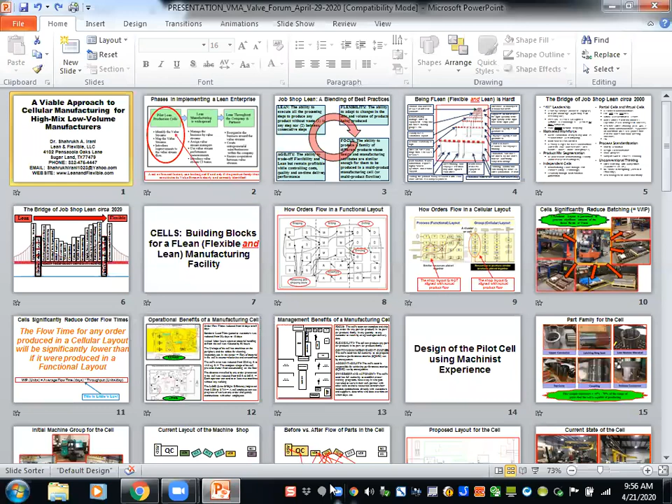Good morning. Today's lecture is titled A Viable Approach to Cellular Manufacturing for High-Mix, Low-Volume Manufacturers. It is a case study, and the goal is to show that when you apply methods like value stream mapping in a high-mix, low-volume environment, the ability to identify product families and be able to co-locate all pieces of equipment and support services needed to produce each product family, that is the foundation for implementing Lean.

And this case study was actually work that we did at Superior Completion Services. So there is evidence that the data analysis and the concept come together.

So when you look at people who talked about lean enterprise, this is again a slide taken from Brian Maskell Associates. The overall view has always been over the years that when you implement lean or you try to achieve the lean enterprise, you should go in three steps. So the first step is you pilot the implementation of production cells. The second step is, you try to make lean manufacturing widespread. And then finally, you try to run lean across the entire enterprise.

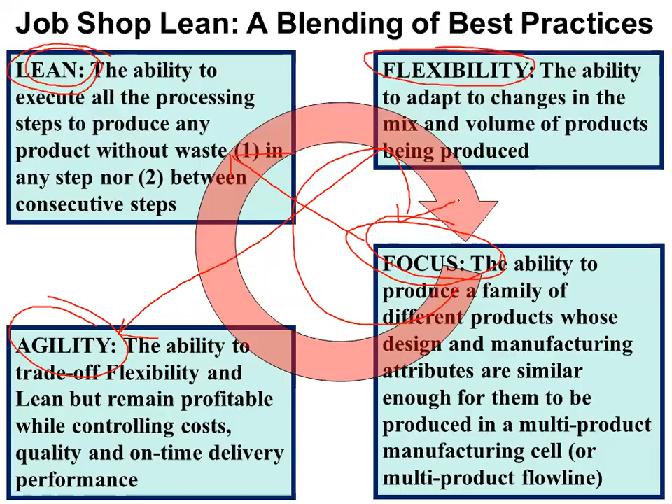And I hate to throw water on your desires, but when people say we wish to be agile and we want to be flexible, they have to understand that all of these operating conditions are alien to a typical Toyota assembly facility. And yet, if we learn about how to attack these challenges, that essentially is going from being lean to being flexible. And agility essentially is the ability to be quick enough when you're having to change mix and volume.

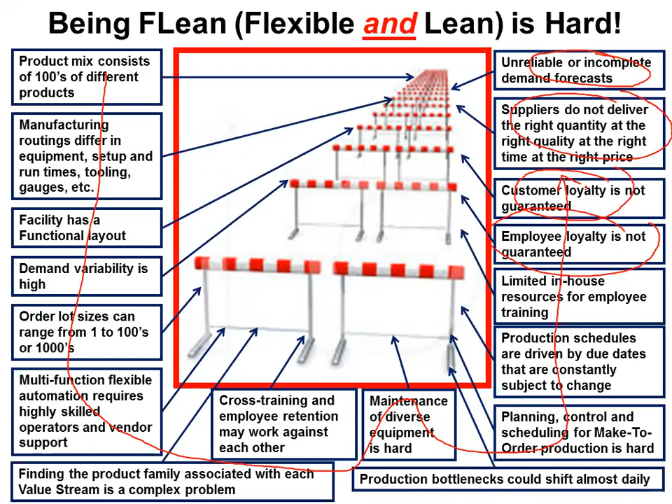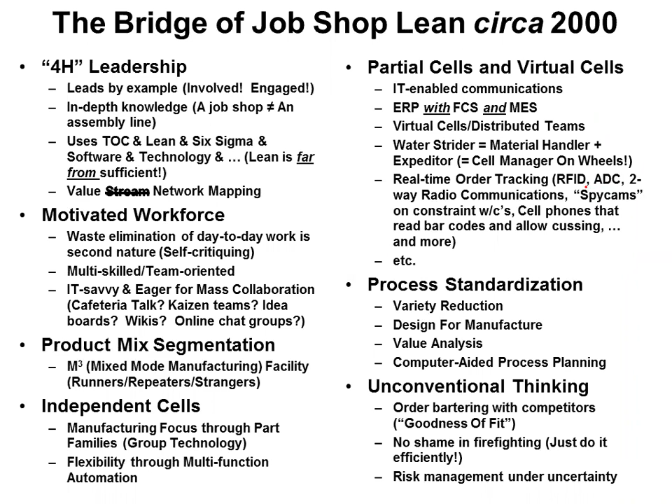So when I learned about lean, that was in 1999, and I've read the book Lean Thinking, and then the Forging Defense Manufacturing Consortium had given me funding to basically start developing this whole body of knowledge that today is called Job Shop Lean. This was all I had. This is what I recognize: if any high mix, low volume manufacturer could achieve all these capabilities, they would be pretty flexible and lean. So come forward 20 years later, that's today.

I mean, again, just as Toyota has a house of Toyota, which people have called the house of lean, I said that, look, we are basically going from being lean on one bank of the river to being flexible on the other bank of the river. So there is this bridge. And when you follow the five principles of lean that were first put forth by Womack and Jones, the three core capabilities that are needed to go from lean to flexible is this one.

First one is group technology using data science. This whole idea of how do I form families of parts when I have, say, 1,000, 5,000, 10,000 so-called different part numbers in my database. I do understand that many of them may just be different because the part number was changed, but how to distill from 10,000 unique part numbers to, say, 2,000, and then in that 2,000 part numbers, how do I know how many part families I have?

Because after all, every work cell I designed, every focus factory I designed is going to be built around a product family. So this is one of the requirements of the bridge, this whole ability to form product families. This then is the column that holds up the bridge on one end, what I would call a flexible cellular layout. This whole idea of be focused, but be flexible.

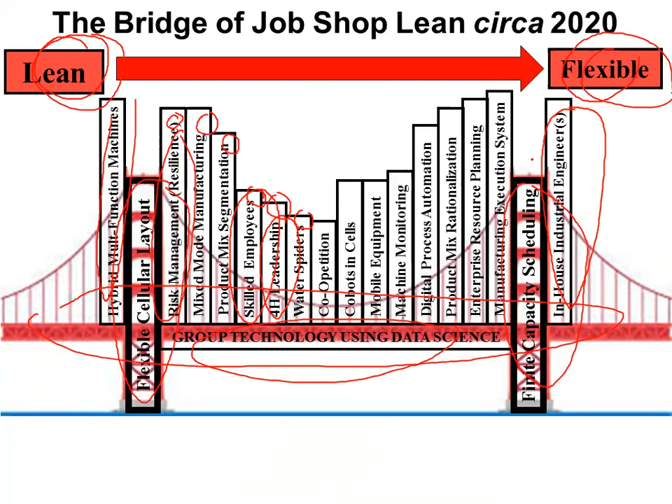And of course, my bias has always been, do you have at least one well-trained, competent industrial engineer to help you with implementing the so-called bridge of job shop lean?

So in my personal experience and bias, of course, is that cells are like the building blocks. If you want to be flexible and lean, you have to basically start with product families and work cells.

And continuous improvement happens when you find that it is infeasible to implement cells. So then you say, well, how do I go to plan B or plan C, where in principle, yes, I'm still working around the product family concept, but because I have not been able to put equipment into work cells, how do I now maintain reasonably something called virtual cells?

So where did this concept of cells come about? I mean, this is an age-old concept where people said that, do you or do you not have a functional layout? In a functional layout, identical equipment is kept co-located in things called departments.

So here you have the shaping department. These are all the milling machines together. There may be different types of milling machines, two of one type, three of the other, but they're all kept together. And these are drilling machines, these are grinding machines, and then you have final assembly.

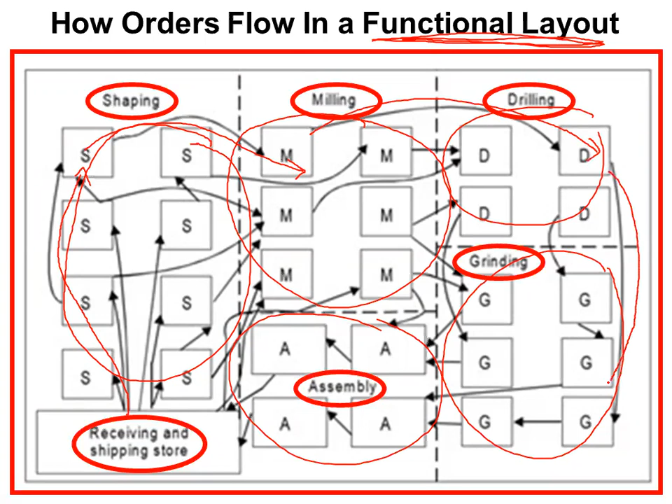But when you look at the physical flow of a product, it begins as raw material, goes to one machine. Then from there, it transitions across the department to one machine. Then from there, it transitions to another department. From there, it transitions to another department. And then finally, it ends up in assembly. And then the product goes out the door.

Horrible. And to be honest with you, this was mentioned in the 60s when group technology first hit the waves. And today, still, I found out very many clients or would-be clients, when you walk into the facility and you ask them, sir, can you please take me through the facility from raw to finished, they have basically left their equipment organized into these functional departments.

And when you look at the success of the Toyota production system, one of the cornerstones is they have aligned their equipment naturally with the way the products would flow through different pieces of equipment.

Okay, so this is not to take away from the fact that at Toyota, their managers have worked up through the ranks. And so they know how to manage people who are now doing their work. This is not to take away from the fact that good people being hired and trained and nurtured and incentivized is also a big secret of the Toyota production system.

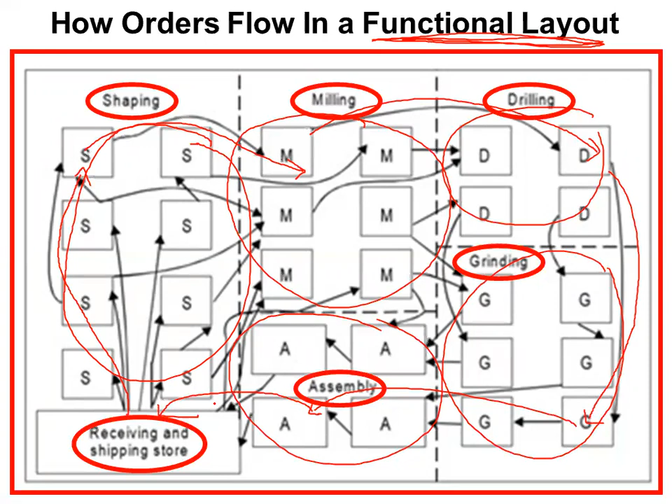But at the end of the day, it's how you do work, how you make product that is also important. So many US manufacturers haven't even got out of square one, and then they claim to be, or they wish to be flexible, but they also wish to be lean.

So when you look at going from functional layout to cellular layout, you can see that in the functional layout, the shop layout is not aligned with actual product flow. In the cell layout, the shop layout is aligned with actual product flow, and the entire product mix has been broken down into these product families.

This is one product family, this is another product family, this is another product family, this is another product family. Now, you might be saying, well, when you look at the work cells, you have the same equipment now being distributed in multiple physical locations. So isn't there a loss of flexibility when you implement cells?

Absolutely. And that is why when you implement cells, you also have to do something called product mix segmentation. You have to look at all the parts you're making or wish to make and segment them on the volume and similarity of production into runners, repeaters, and strangers. If you Google this term, that was basically a very old concept, but it was the basis for saying that we need mixed mode manufacturing facilities when those facilities wish to make a high variety of product in different volume.

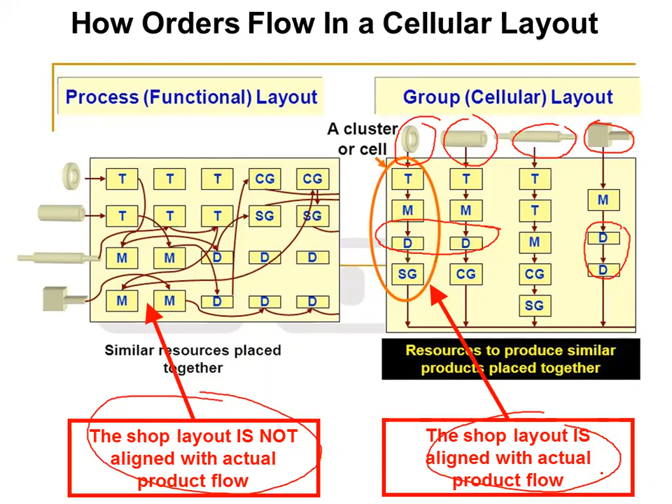Transformation from a functional layout to a cellular layout is a cornerstone of job shop lean. Again, all I'm saying is that this is what has been known to have worked in the 1960s in Britain and other European countries. I think where they failed was the people aspect and the management aspect. Toyota has figured that out. Unfortunately, since they are high volume assembly, a lot of their practices cannot immediately be transferred to high mix, low volume.

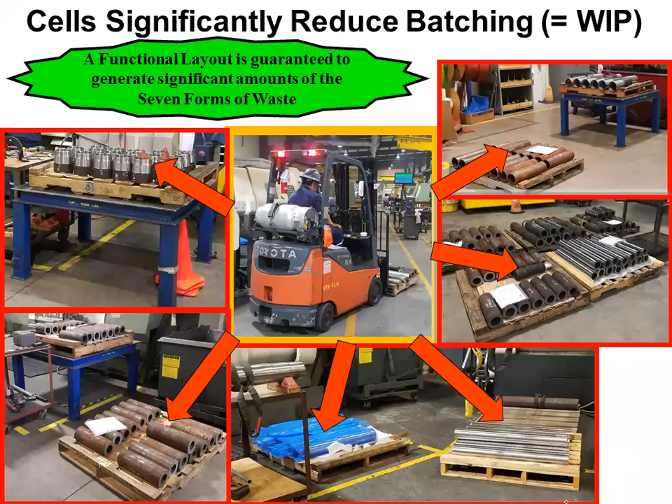So what do cells do? They basically attack work in process. When you look at a functional layout, it is guaranteed to generate significant amounts of the 7 forms of waste. And you know how easy it is to pick that up? Go look for when you are walking through the facility, either as a Gemba walk or walking the floor of a product, you look for forklift activity. Look for forklift activity, and then you look for pallets, pallets, pallets, pallets.

This was the situation when we first began to implement job shop lean at Superior Completion Services. And the goals were pretty straightforward. We want to minimize the use of forklifts within the shop to the extent possible, especially around CNC machines. And two, we wish to have a complete handle on how many jobs are in queue, where they're at, and we wish to minimize the number of active jobs.

If you know Little's Law, it's a very simple way. There are lots of assumptions for Little's Law, but it basically connects that when there's a lot of work in process in the manufacturing system, it will take a long time to get orders out of the system. Very simple. So the more you cut down work in process and the more you make it possible through cells to get orders out quickly, you're going to have both quick delivery and less cost of production.

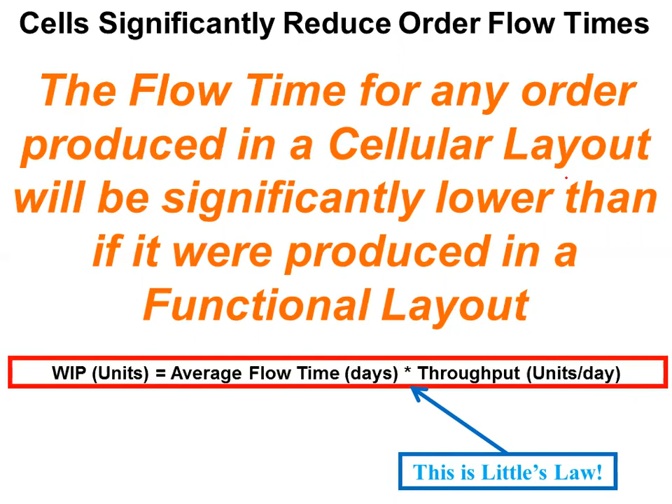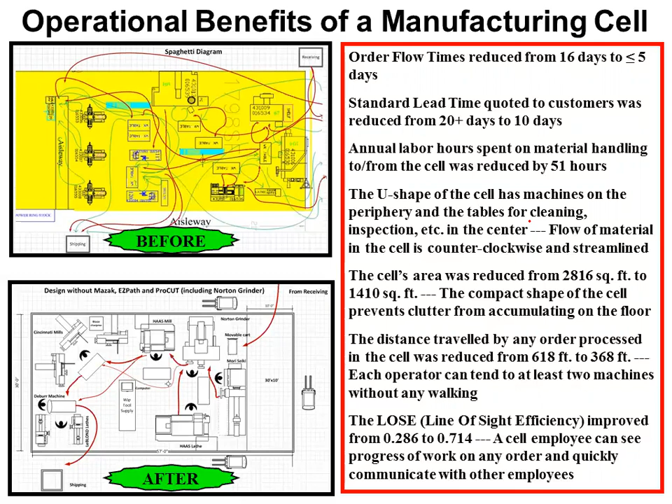And there are, of course, support services and other things you can do to increase the benefits you gain. But going to work cells is also an alternative to continuous improvement, not necessarily calling it lean. So these are the operational benefits of a cell.

These are the management benefits, and I would like to spend some time on that. How does a manufacturing cell get you some very important benefits that people attribute to lean? The first thing is focus. The cell doesn't do anything under the sun. The cell has a certain boundary, a certain focus in what they produce. And that helps because there's a learning curve effect.

They become expert at producing any order, but they have a sense of, well, I produced this order in the past, this new order I received is kind of similar, I can do it. And the more you make the equipment flexible, the more it will be possible for that same cell to flex and make a variety of products. So that's the second thing, that the cell is flexible.

I mean, the way you design cells in high mix environments is to create product families. And a product family is not identical parts. As long as that group of machines can make parts with this range of design and manufacturing attributes, it can be produced in the cell.

There's the second benefit you get from having work cells: flexibility. Then you have this culture where that team is authorized to make any improvements they seek, and they can do it with whoever in the cell, whenever they wish to, as long as they make the improvements.

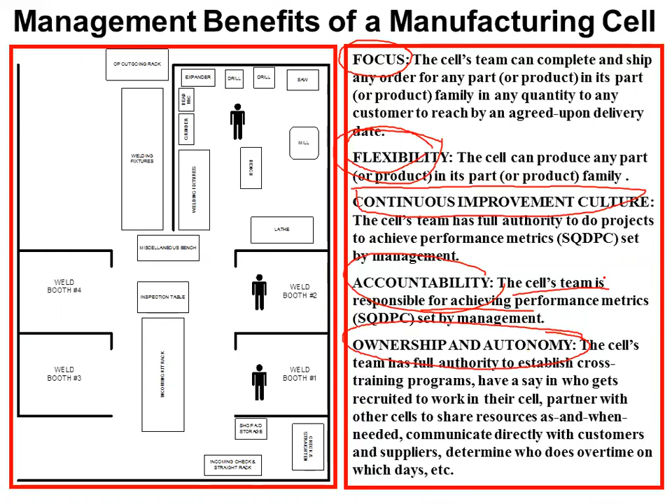Much of this is where I think US manufacturers still haven't got it right. A company like Toyota really has got it right because they've been doing it for decades. But these five capabilities or attributes a cell can easily achieve, if correctly implemented and supported.

So what did we do? This presentation basically discusses everything that worked and did not work when we tried to implement the first pilot cell in the machine shop of Superior Completion Services.

Naturally, when you go in and you don't have the data, you approach their veterans. You look at their machinists, their estimators, their CNC programmers, and you say, well, you had said that you have a so-called cell. What do you think would be all the parts? What should be the family of parts that you would produce in this cell?

So Steve Ward was the leader of that group, which did the brainstorming. They came back and said, these are the parts typically that we would want to run through this cell.

You will notice that besides the turning, there's a lot of milling, and there's some coating. But effectively, there's a lot of turning and some milling, and these are small to mid-size part diameters. This sample of parts represents about 60 to 70% of the range of parts that the cell is capable of producing.

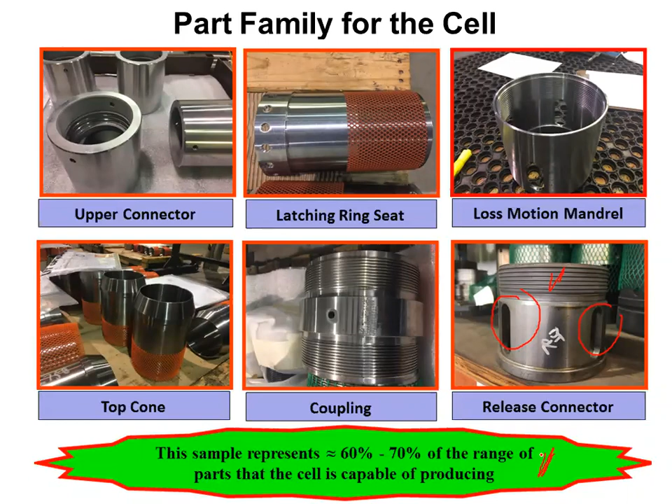Once you have the product family, then you say, what machines do we put inside the cell? It was very straightforward. We walked to the floor, we went to the lathes, and they said, these lathes get bar stock. This bar stock is cut on the saw, so it's the lead-off machine. Then these were basically the lathes.

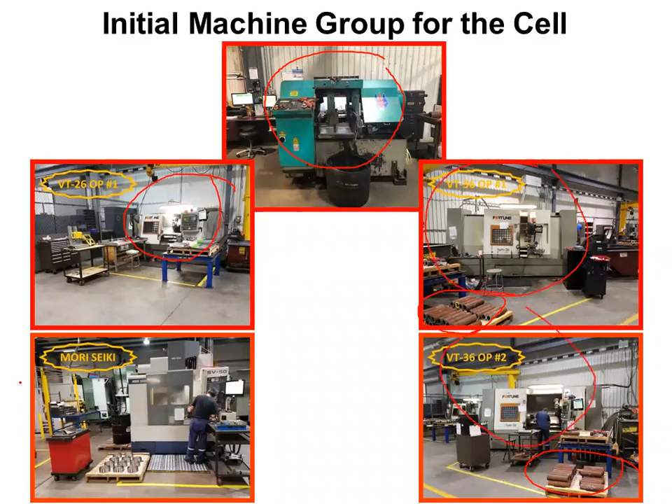And this was the milling machine. They said, if we could try to put these machines together, that would essentially do the turning and the milling for those parts that we think should be produced in this work cell.

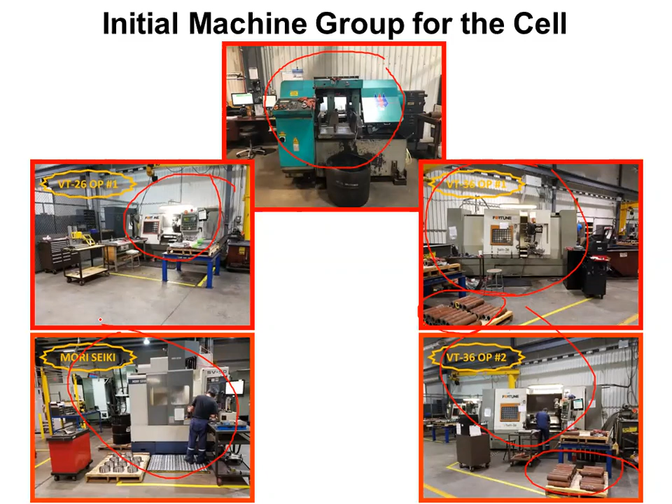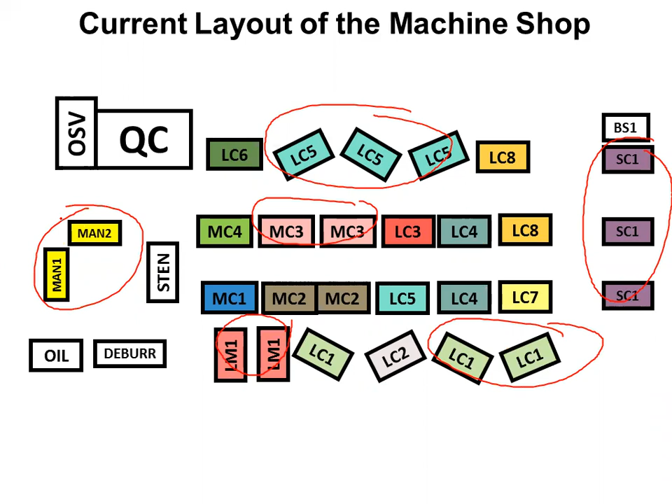So when we took the parts that management agreed would be produced in this pilot cell, and we walked the flows of those parts through the machines, guess what? In the initial state, this is how they traveled.

Outside vendor is in the case where you have the shipping docks there. So if the parts had to go out, they would go out on that side of the shop.

You can see that whenever you implement work cells, automatically you're doing what Taiichi Ohno did in the 50s. He basically said, I will align my equipment in the natural processing flow of the products through those equipment. So this was how the parts flowed, and that was what he basically said. Given that the saws are here, why don't we essentially take all these machines and try and bring it here?

Once the physical travel of the parts is reduced, all the other benefits of lean can be systematically implemented. But that is key. Can you at least bring the necessary group of machines into a co-located area?

If not, then you do continuous improvement plan B, which is: how do I operate these machines in a virtual cell configuration? But that goal to make a family of parts in a cell configuration is absolutely essential for Job Shop Lean.

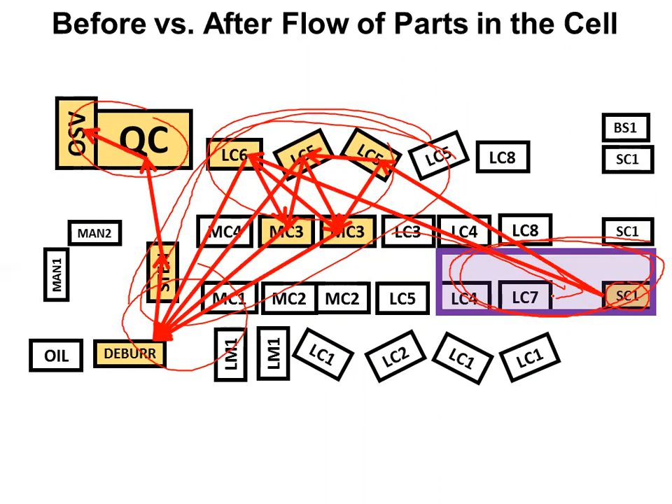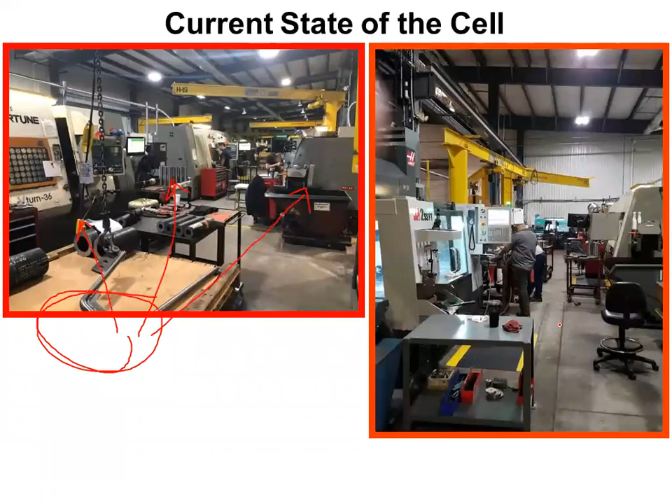Then we put the VT26 here because we said basically let's allow some flexibility as far as workload balance. And then when you go to the other end, you can see that the two VT36s are here. This was the VT26. This is the saw up here, and this was the new Haas machine that was implemented. So this was how the new cell looks like, or at least looked like when it was kind of completed.

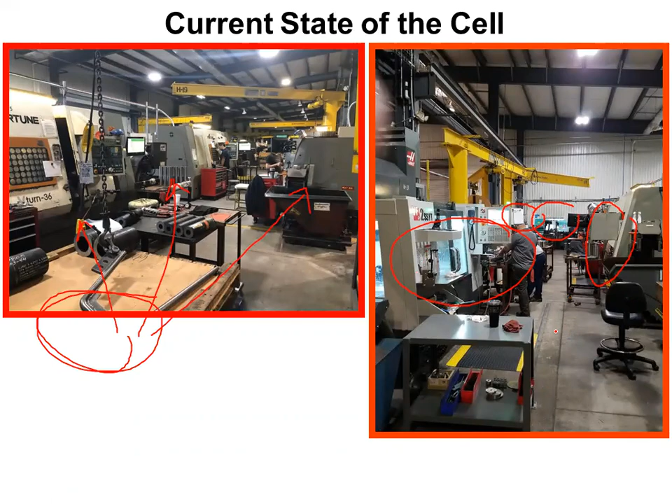So we had discussed the case where the pilot cell was designed with machine shop experience. But we wanted to know, have we correctly identified all the machines that should go into the cell?

When we talked to the shop supervisor, the plant manager, and the machinist, they said, oh no, the parts that come off these VT36s and VT26 go all over the shop. So what that told us was that there was no discipline.

This machine shop was running like any old job shop. Hey, I have capacity, the machine is free, run this job. Nobody would care about how much time did it take to set up the machine and to run the job. It was basically keep the machines busy.

So we had to step back and say, is there any data that we have that we can basically use to understand that the group of machines we are putting and the product family that will be produced in the cell is going to end up being an autonomous mini job shop.

So we took the data from the machine monitoring system called CIMCO, and what we tried to do essentially was to produce the PFAST input file. As you know, PFAST is a production flow analysis software, production flow analysis and simplification toolkit. If you take the letters, it gets PFAST.

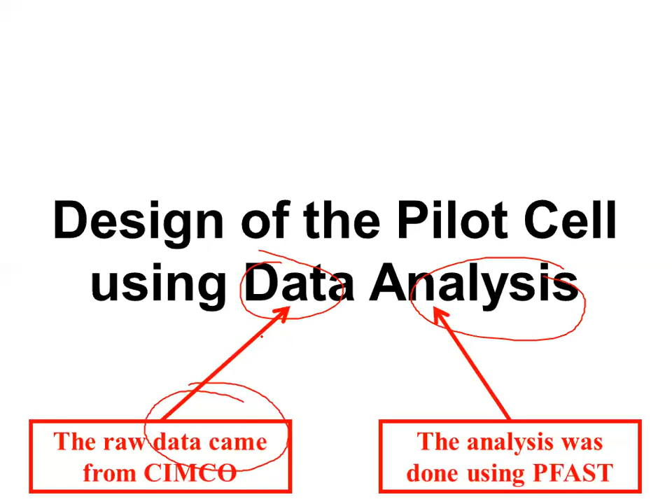So the data was obtained from CIMCO, and the analysis was done with PFAST. What was the analysis we did?

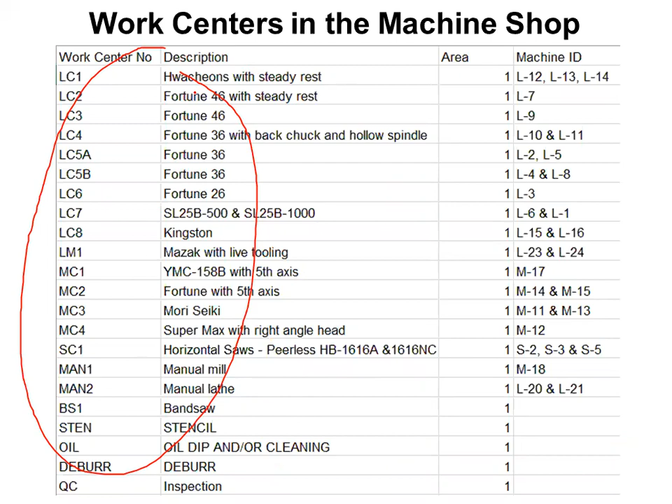So these were all the machines in the shop. And what we are trying to determine is, besides those Fortune 36s and Fortune 26s and the small mill, how many different machines was this part family being run across in the current state? So this was what is called the from-to chart.

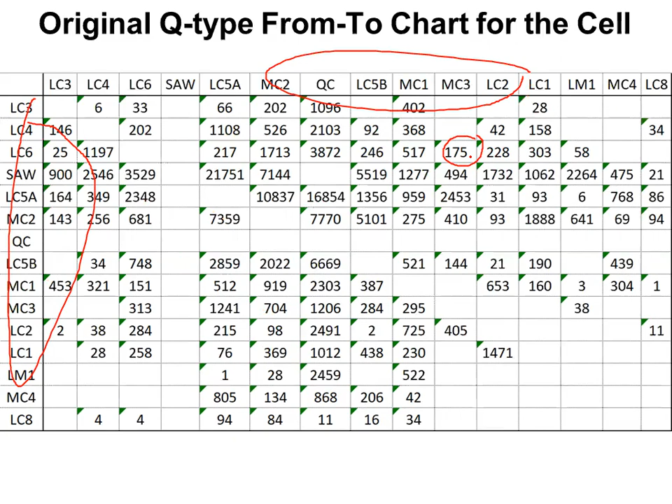This is one of the outputs that PFAST produces. And the beauty of the from-to chart is that from any of the machines in the shop to any other machine in the shop, we can tell you how many individual piece parts moved from one machine to the next. So that basically captures the usage and the heaviness of usage.

This was the reality. So here we had the work centers that we had initially said, okay, let's put the lathes in the work cell. So what you see now is these machines were sending work to all these other machines inside the shop. And then we had all this other traffic between those machines themselves. So we didn't care much about the other machines. The bigger thing was, do we really need to put more machines into this work cell? And if so, what should be other machines?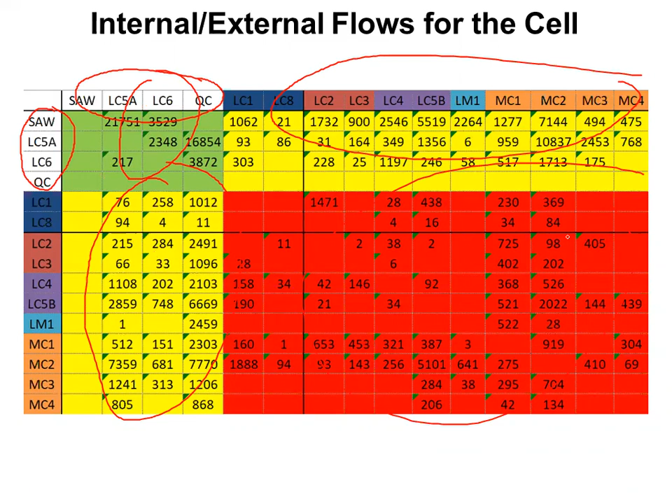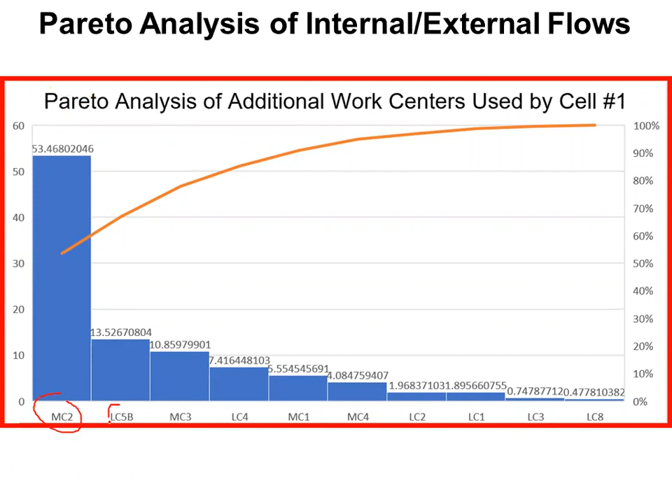So when we did a Pareto, again, this is data analysis that is the topic for another lecture. But the point again is that once you have machine monitoring system data available to you, you can do some pretty nifty material flow analysis and machine usage analysis as a lead into defining the composition of a work cell. So these are all the other work centers you can see. It's a classical Pareto analysis.

So we basically went and asked the machinists. We had Todd, we had Al, Tom, essentially everybody from the director of manufacturing to the plant manager to the shop supervisor to the CNC programmer to the machinists working in the cell. We sat down and we asked all of them, why were all these other machines used? Why? And the comments here will tell you that there were some serious shoulder shrugs that we observed, that we don't know. But essentially, what was happening was that the shop supervisor was saying, look, I need to keep the machines busy.

Okay? So, without making effort to ask how much are the lathes in the cell being used, the moment that work came in, it was like, okay, we'll run the order first through these machines and then use some other machines. But why? Was it that they were unnecessarily running orders through these machines? And then because those machines didn't have the capacity being in the cell, the rest of the jobs had to be run on other machines.

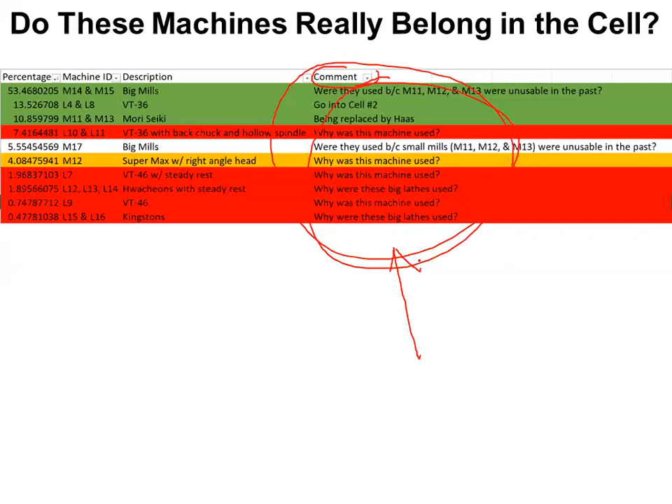So when you have the data about how parts actually get routed through the shop, it really helps you to understand what do we need to put inside each cell, or even to step back and say, hey, do we even need to implement cells? Is cells the right implementation, or should we have a configuration like cascading cells or virtual cells?

So once we knew what machines and what parts were going to be produced, this is what was done to actually implement the pilot cell. So keep in mind, strategically, we're basically saying, what can we do to make the cell work like an autonomous business unit? Work comes in, work gets done, work gets shipped. Okay, so the first thing was the 4H leader. I think that was very important that the director of manufacturing, Todd Chretien, took leadership. So I think that's most important.

So there has to be clear knowledge across the executive group, the front office, and the shop floor that the director of manufacturing means business and he understands what needs to be done to implement job shop lean, and he's going to be there every step of the way to guide you, to mentor you, to help you, and to clear obstacles. So I call this the 4H leadership, and the H stand for head, heart, hands, and hooves. Now again, no human being has hooves. They're not horses or asses, but it just sounds pretty cool, right?

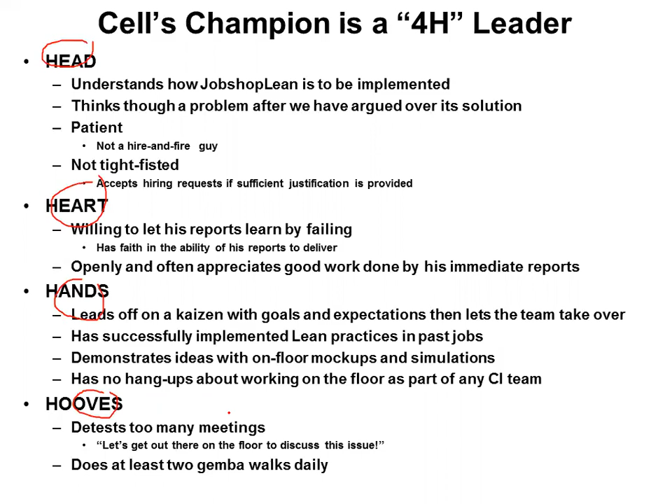4H, 3P, 5S. So you can read the slide, but these are all the qualities that Todd Chretien possesses and demonstrated. And I think because of his leadership, everybody felt comfortable that if the boss is buying into job shop lean, we should buy in and we should support. That was the first thing, right? That everybody on the floor saw myself, Todd, and Hal, the plant manager, join almost every day in that corner, looking at what the work cell should look like. And we even had a whiteboard and we put post-it notes out there and we encouraged employees to walk up and post their ideas on that board.

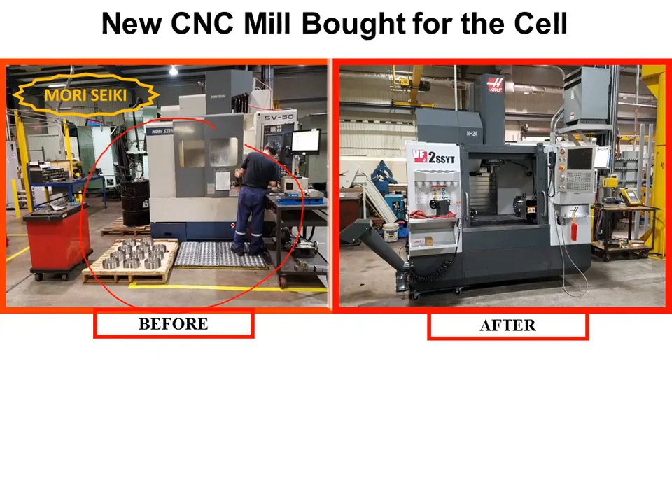We brought all the accessories of machine usage, so jaws, ring gauges, boring bars, to every extent that we could. We basically had these accessories being stored in cupboards along the far wall. They were in cupboards over here, way outside the cell. We just had the machinist say, what do you need? And all of that essentially was brought in.

They repurposed an empty bookshelf, and poof, you know. Now there was no longer a need for them to go around the shop looking for a cart, roll the cart to the cupboards, look for jaws and gauges, and then roll back those accessories, use them, and then put them back. It was all put right at the point of use inside the cell.

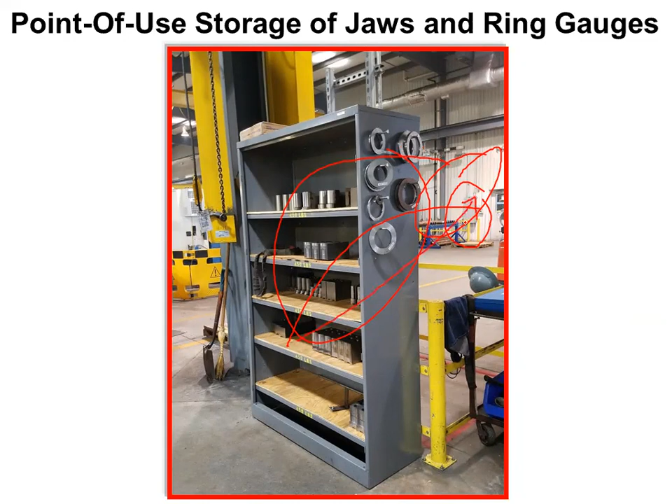Then we had the stenciling machine where they put the IDs, right? So we had them in the stenciling area next to the deburring department, and they went and repaired one machine, and they brought that, and now all the stenciling was being done inside the cell. Now, the employee who was running the stenciling machines and doing the deburring, what he would do essentially is on a signal, he would walk over to the cell and then take the parts that they had completed and put them on this machine and stencil them.

Over time, he taught the machine operators inside the cell how to operate the stenciling machine, and then they took over the work for him. So many good things happened where the employees themselves saw it's logical to now start working this way. And they took the initiative, and that's the beauty of implementing work cells, that it doesn't take change and apply it across a large enterprise at one shot. It breaks up that change into pieces, and it trusts employees to step up once they accept, yeah, this makes sense. This is a new way to work. It makes sense.

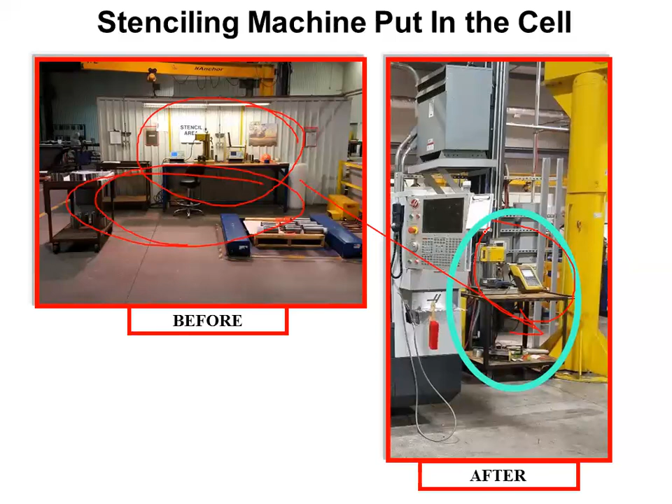Then we had thread protectors again. This stand was over here along the wall, right? And they said, okay, why are the employees having to walk out of the cell, look for scissors, cut these thread protectors in long segments, bring them back to the cell, and then slip these sleeves on both ends of the part which had the threads.

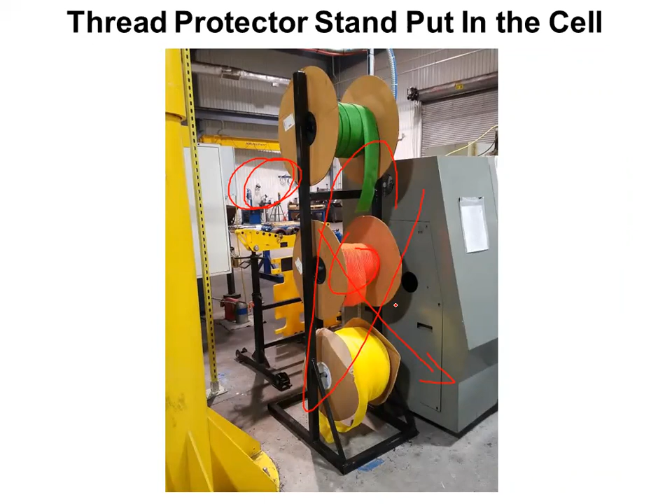Because if a threaded part bangs against another part or someplace else, it damages the threads, and that's so many thousands of dollars wasted. So once again, why are you leaving the cell? Oh, I'm leaving the cell to get thread protectors. Okay, guys, what will it take to put these thread protector stands, one to each cell? Nothing. Okay, bring it in.

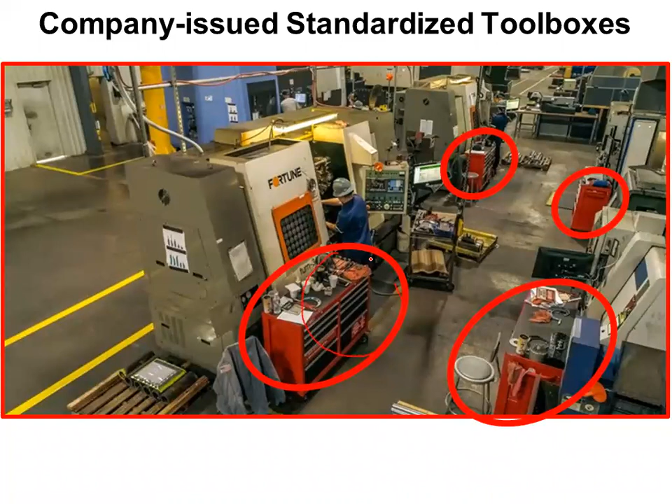Then, of course, this thing about toolboxes, right? At one time, every employee had their own personal toolbox. And especially from an inspection perspective, that's a nightmare, because the inspection department would like all micrometers and gauges to be standardized and calibrated for their rules and their guidelines. But when you've got people using personal tools, there really isn't that control.

So quite some time was spent to understand what should go into each of these toolboxes, what should the first drawer contain, what should the second drawer contain, and then there was a rollout. Every machine had its own toolbox, and the machinists were allowed to have their personal toolboxes, but we made sure that all essential gauging and tooling was issued by the company and maintained and calibrated by the inspection department.

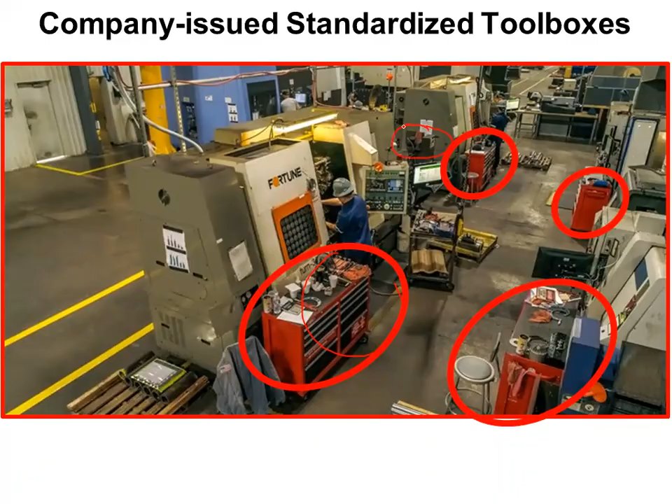This was up and down, this concept of transfer batches. So once the saw cuts the bar stock and puts the bar stock on a pallet, on a stand like this, inside the work cell we wanted the machinist to say, okay, turning is the first step. Once I turn the part, let me move it to the next step, either the second lathe, the VT36, or the Haas mill.

So it's a little hard to do one piece flow in a classic assembly line context. Think Subway, or Chipotle. You ask for your sandwich to be made, and that sandwich goes step by step. Or in a Toyota assembly line, every car goes through a certain sequence of steps, one piece flow.

We feel that transfer batches are the intermediate between a batch of raw material and the one piece flow that you seek. Because with transfer batches, you can have imbalance between processing steps, and you can allow for batch sizes to differ. So can't say we were very successful. These were the carts that they had, and you can see that they still load them up because the surface allowed so many parts to be held. So what would happen?

They would lovingly and dutifully make all of these parts and completely load the cart and then push it to the next machine. And then we had the lower level also. So we did try to implement a right-sized cart, but I wouldn't say that we really succeeded in getting that mindset out of the employees. So you can consider this improvement as iffy, as a work in progress, or basically, hey, try something new.

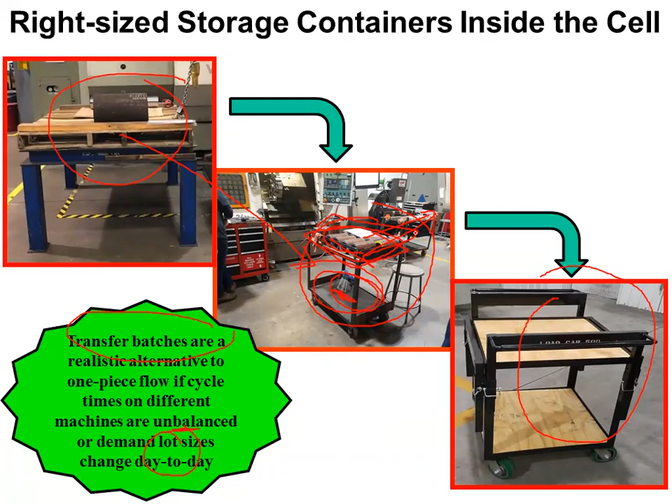I think it's a work in progress, and I think this concept of transfer batch or one piece flow is going to vary with the individual application, the individual machines and products and cycle times and operator skills, and whether you have one person running three machines or one person to each machine.

This was a very successful implementation, that of a water spider. So you've probably read about water spiders in the Toyota production system. Essentially, the machine shop supervisor, Tam, who is an expert machinist in his own right, he essentially became a water spider. And you can read through all the things that we tried to have him do. Sometimes it was maybe too much work, and there were ups and downs in his day. But all of these activities, he essentially rose to the challenge and performed them.

So the water spider is a logistics role, a position that in job shop lean is a given. Almost in every client situation, I've personally pushed for one of the better employees to be repurposed into a shop logistics position. And in fact, if you look at the robots of today, autonomous mobile robots, automated guided vehicles, it's just a matter of time before robots on wheels, mobile robots, start doing this function of the water spider partially.

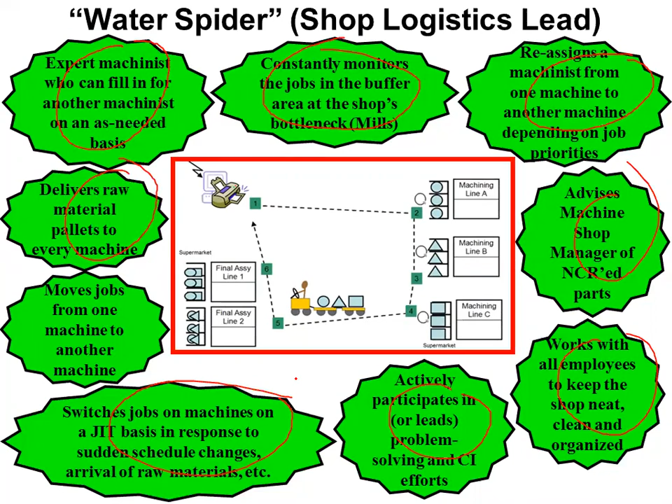But this was, I think, a very successful improvement that we made where the supervisor now took charge of ensuring that orders were on time, and then as soon as they were completed, he would personally pull the pallet jack or the forklift and move them to the next machine. It was a very successful practice that we implemented.

We also had people from different departments who were impacted by the machine shop. We had them essentially move roles. So, for example, here you can see that the shipping and receiving department and the assembly department, their managers would often just meet with each other at least daily. We thought of having one manager, but again, what do you do with the second person? We did not go there, but there was more of this cross fertilization. Again, it's a common practice, morning huddles, but it is who you put in the huddles and what they talk about that is important.

Then we even had two employees from the shipping and receiving department now report to the machine shop manager. That created more awareness where they started seeing the parts that were being produced. And so when it came time in the cage, where all the parts were being kitted before they were rolled to assembly, now those people who worked in the warehouse became a little more savvy about what other parts we were looking for. So when they looked at the kit, they would know which part was missing and then go either asking in the machine shop, where are you on this part? Or they would be saying, hey, has this part been misplaced in our own racks?

So this was very important, and there was a lot more talking between the machine shop, the outside processes like heat treatment or coating or grinding, and even the outside vendors who sometimes were called in to make parts that the shop could not produce.

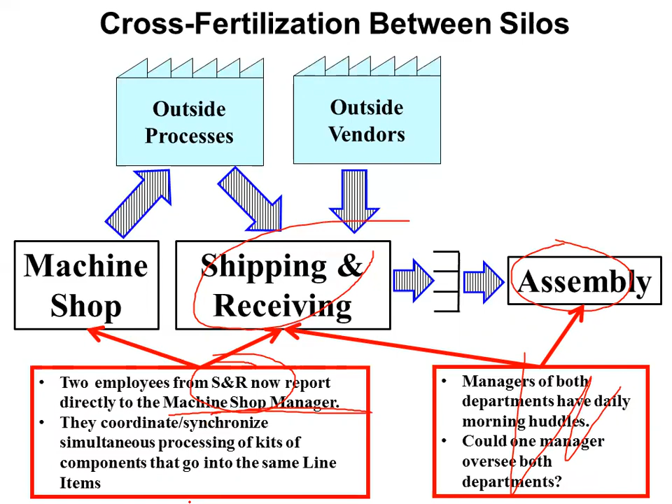This is a work in progress. Production controller and shop scheduler. We've had new people move into these positions. There's Vanessa Orango and Daniel DeWitt, and they are still kind of figuring out who does what, and what software do we use, because they have now transitioned to Microsoft Dynamics 365 as the new ERP system, and the Tactic scheduling software did not exactly prove to be usable. Too much overhead to use it.

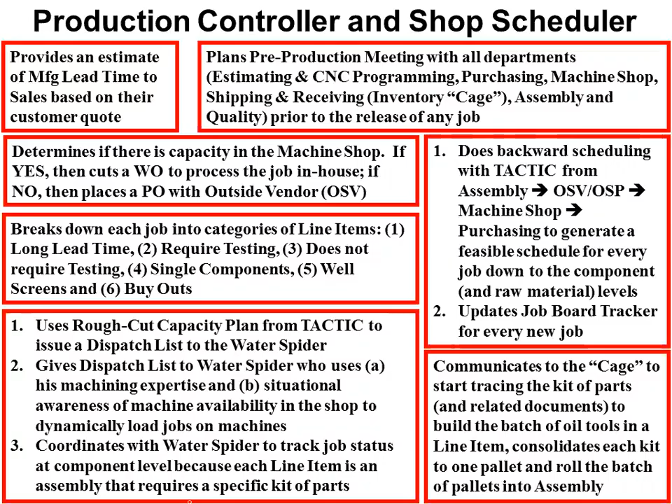So these were all the functions that Vanessa and Daniel performed together, and this will be discussed in another presentation. But what we did do was, at a very high level, we had simple theory of constraints.

So the saw is the lead off machine, right? And you saw that there were three saws, and the capacity in the saws was shared between the pilot cell and all the other cells and machines that were going to be implemented in the shop. So we had to create a simple visual management device where there was one area set aside for the raw material which would be consumed in cell one, and this was right across from cell one. And then on the other side, they would put bar stock for the other machines in the shop.

So at least we tried to get a sense of, do we have enough for cell one? And once we have enough for cell one, okay, now cut material for the rest of the shop. So again, there was a little bit of babying of what was done in cell one, but you can see again that some of the improvements don't have to be rocket science. And this was a very simple way to split the work buffer.

So you control how much work is put into the cell, and you control how much work is put in the shop. So if you don't release raw material, you're never going to have any work in process. If you release too much raw material, there's surely going to be a growth of work in process in the shop.

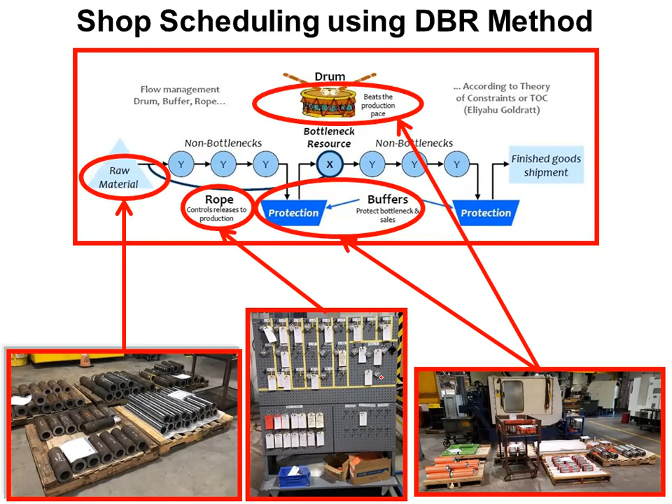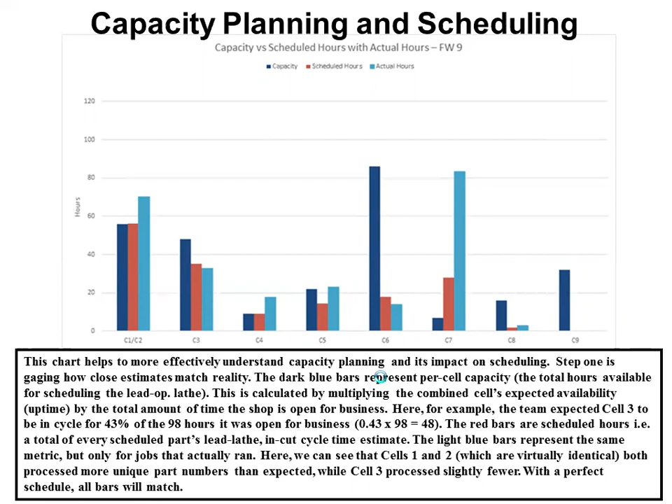This is again something which will be deferred to a later presentation, but once we had the CIMCO data coming off the different machines, Daniel essentially spearheaded very effective capacity planning and scheduling, and this was discussed in a recent paper in Modern Machine Shop. I'm going to cajole her, request her, when she has time, to prepare a presentation. The same thing with shop performance monitoring. Everybody says OEE, and she basically combined machine utilization with job throughput. So that's another very detailed conversation that hopefully she'll present down the road.

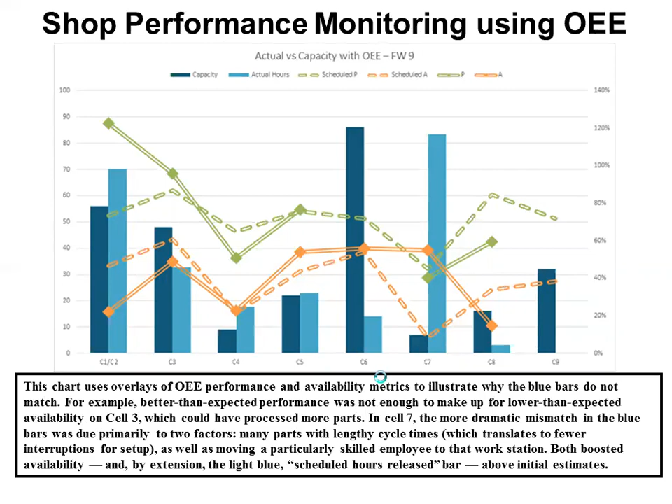This was something which we were able to do with CIMCO again. Machine monitoring is a must-have technology, but my caution to all of you is please don't just use the machine monitoring the way that the vendors tell you to. I think that they're shortchanging you, and there's much more that can be done, but I think you need a data analyst type person, somebody like a Daniel Dewitt. She's the manufacturing data analyst and scheduler at Superior.

So what we were able to do with the machine monitoring software output was we were able to create a timeline for every order that the shop shipped. And in this timeline that gets printed out, yellow shows that the work order was in setup. Green, it was in process. And black is all the non-value added time. Guess what? You want to implement lean? Data analysis and machine monitoring? Need lean. So when you ask why is there so much non-value added time, these are all the reasons.

So job shop lean kind of looks at lean and pushes it to the 21st century. And it's common sense that when you have all this technology available, people are talking about IoT, Internet of Things, and machine learning, and smart ERP and finite capacity scheduling. And you have to ask, look, where is the data? And if the data is available, what are we doing with the data?

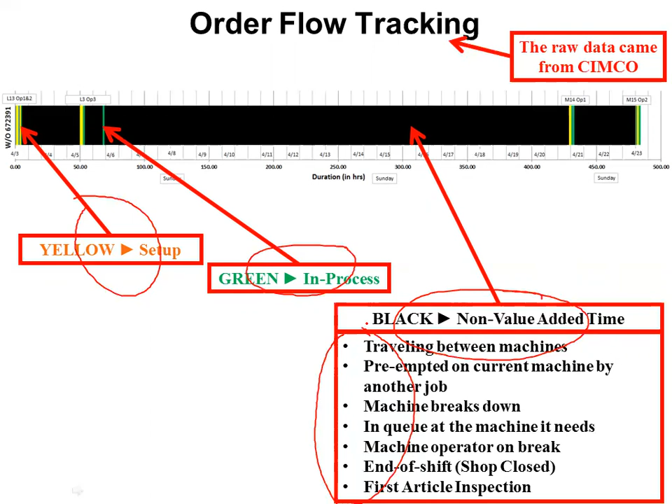So what was the feedback about the cell? Well, good things. Todd Chretien sent out an email to his team, everybody in the machine shop. This was November 2018, and I think I'd begun working with them about July. So that was pretty good. Todd was happy, and his boss, Ed Smith, was happy.

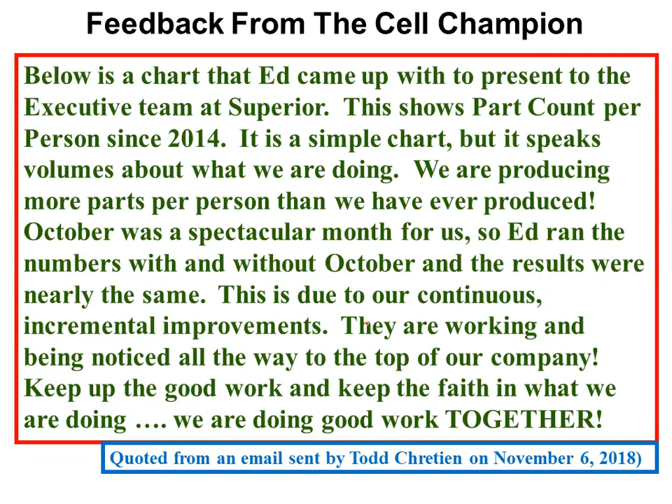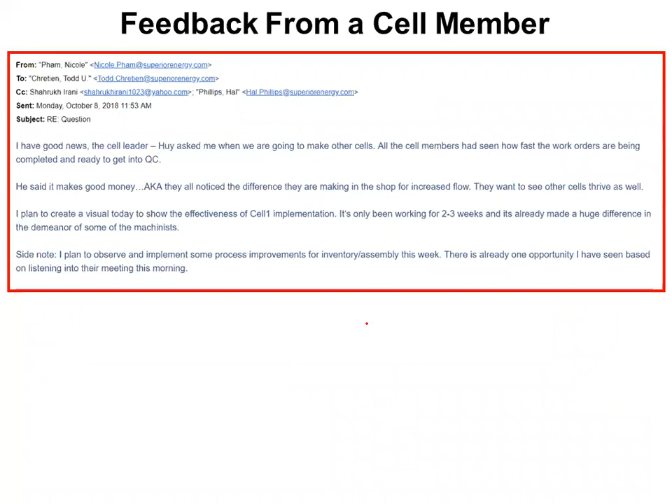So we were happy. Then Nicole, who was then working as a shop supervisor and production controller, sent an email saying, look, I was having a conversation with the cell leader. He likes what is going on in the cell. He's like, hey, can we get more cells implemented? So both Nicole was happy, and Huy was happy. He was one of the very friendly machine operators.

And then finally, people outside the cell got interested. This was the machinist who ran one of the bigger, long bed lathes opposite the Kingstons. In fact, this is one of the Kingstons. So he sketched out what he thought the side of the shop which would make the big parts would look like.

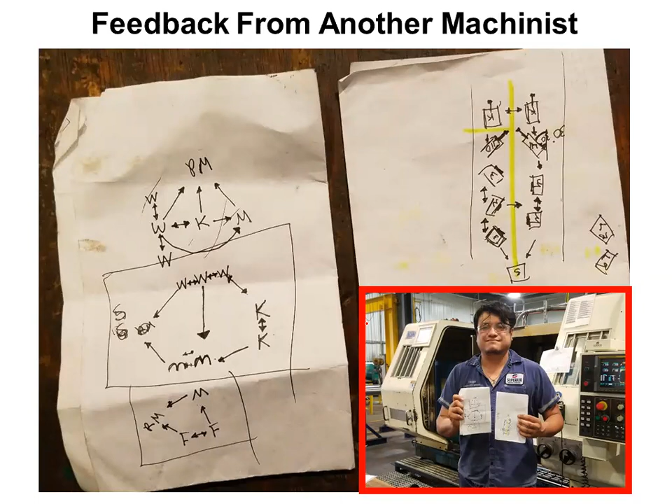So the word got around. I think the good thing was that people were seeing that the way Cell One is operating is a different way that the machine shop is operating. We're hearing good things about it. Management seems to be on board, and you start getting good vibes from the other employees who have the interest and the smarts to maybe in the future run their own cell.

So what are the challenges? The goal is to create an autonomous work cell, and every river has its rapids, every good idea has its downside. So let me share with you things which did not go too well. And when things don't go too well, you basically do what is continuous improvement. Continuous improvement is not necessarily improving—oftentimes it's trying to look at the root causes of failure or obstacles and saying, what can we do to overcome these obstacles?

So here are some of the things which we did not succeed at, which I feel can be overcome, but not without pretty radical and aggressive effort from management down to the people who are opposing those changes being made. So here are some of them.

Deburring is noisy, deburring is dust, and the deburring equipment was put away in a room in one corner of the building. Robbie Al, the CNC programmer, came back and said, not a problem—we can just put a deburring tool and an extra step in the CNC program. And now most of the parts produced in the cell will not have to be sent in a batch to the deburring area. So good things happened. It took time, but we were able to take this outside operation and absorb it into the cell.

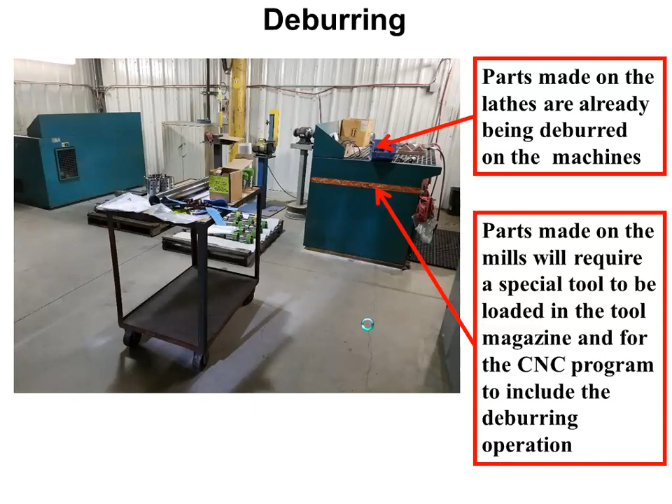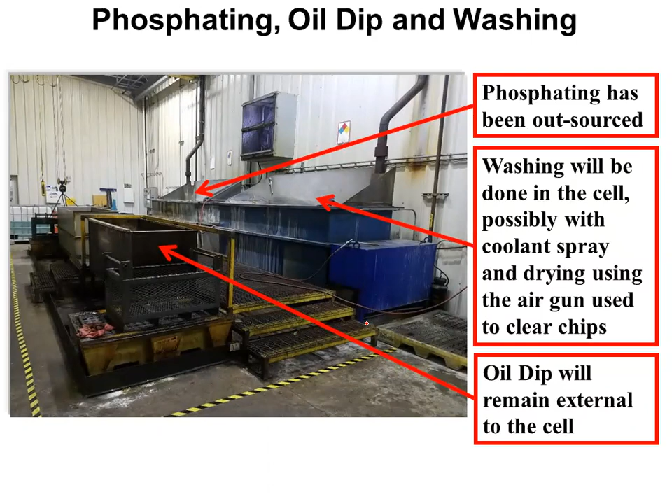Inspection was, you know, a killer. Why? Because in this particular facility, the machine shop was its own entity, and the inspection department was its own entity, and inspection viewed themselves as 'we protect the company from the customer.' It was, I would say, an unnecessary barrier, but the culture was so ingrained. There was a director of manufacturing and a director of inspection. There was a machine shop manager and an inspection department manager. And there was no meeting of the minds between those departments.

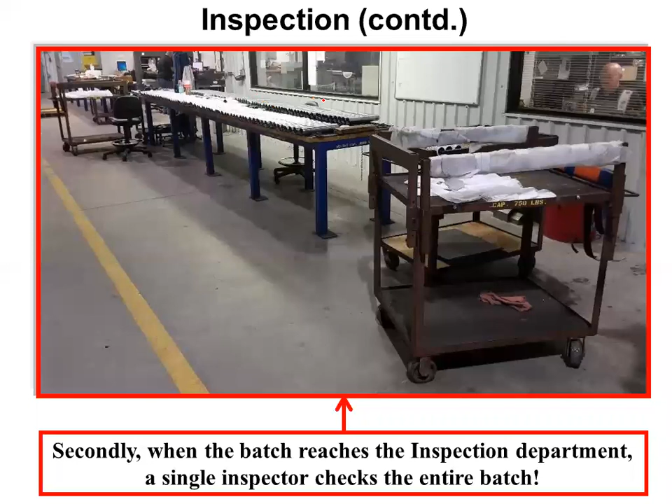That one inspector would one by one unload all these carts and put these parts one by one. Why? Because it was easy for them to take the gauge, check the same dimension one by one, and go right down the entire line of parts, then circle back and check each part with the same gauge and each critical dimension—that particular classic batch mode. So if there were 4 dimensions to be checked, he would first get the batch, check one dimension all over, then the second dimension all over, third, fourth. You want to see why the shop was not running lean?

Right there. But between you and me, being realistic, these are some of the massive killers of lean implementation, just because of the way people chose to do work. Again, why did they have one inspector checking the entire batch? Responsibility. You might say, well, can't you split the batch and have multiple inspectors? Well, unless you standardize work, unless your inspectors have been around long term and are all equally skilled, how do you know that one person's inspection process is consistent with the other person's?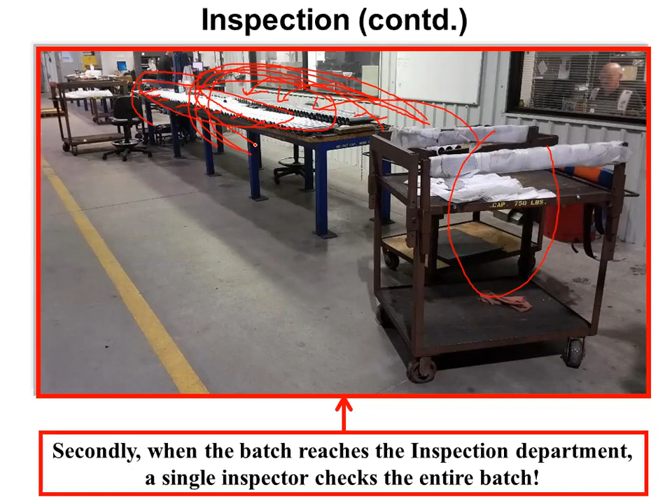There's a lot more in the story, but you can see that bringing inspection into the cell initially was a massive challenge. But again, people got the idea—people understood that batch production and batch inspection was not very good for work-in-process reduction and reduction of order flow times. So we began working on this idea of bringing inspection into the cell.

You can see that this granite table was put opposite the work cell. There was an inspector who would walk from the inspection department, come to the cell on signal, check the parts, and then when done, go back to the main department and be reassigned to other jobs. Is that perfect? No. But the fact that within a few months, two powerful people, two directors, said, 'we need to see what we can do to improve shop performance,' and this needs both the machine shop and the inspection department to work with each other.

To be honest, I think this first article inspection is pretty unique in the challenges it possesses. I heard the same thing from another client in California.

So I have a batch of, say, 20. I have to get the first article inspection done. It needs to use the coordinate measuring machine. I don't have the coordinate measuring machine next to my CNC machine. So the machinist makes the first part—it's a high precision part, an aerospace part—then they walk it over to inspection. During that period, this machine which was set up to run this part just waits and waits. It's locked up. Only when the first article inspection is passed does that first part come back, and the machinist continues and finishes the complete batch.

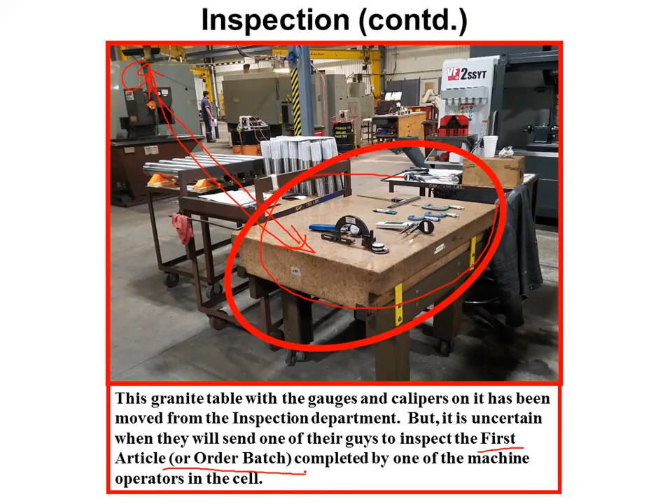So we did get far. I cannot say it was perfect by the time I left. I would need to find out what they've done as far as making inspection also self-contained to the cell.

Ergonomics was another issue—you can see these big platforms. While the platforms are good, they leave the parts at an easier height so people don't have to bend down to the floor to pick parts up. These big containers and pallets would imply forklift travel, and forklift travel in confined areas is not exactly safe.

And what do these pallets encourage? Batch production. So just between these two adjacent lathes, they would take the first stop and transfer parts part by part here. So you had batch production again, right?

What we did was, again, we had these carts. So when the machine filled up the cart, it would get inspected here, and then those parts would be put back. Even across the aisle, the Hwacheons were opposite from the cell. We did at least get to using these carts so that a transfer batch was produced and inspected, and then another transfer batch was produced and inspected.

So not perfect, but as long as the mindset is fertilized in people's minds that, look, keep thinking about what has happened with this part you finished—does it go to the next machine, or does it go to a pallet, and how long does it wait?

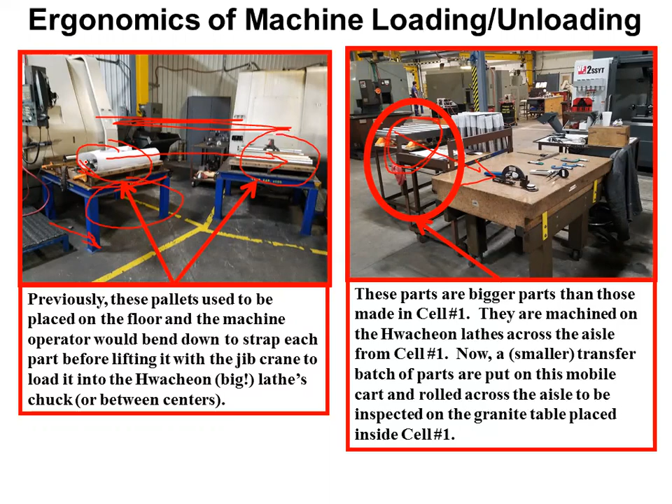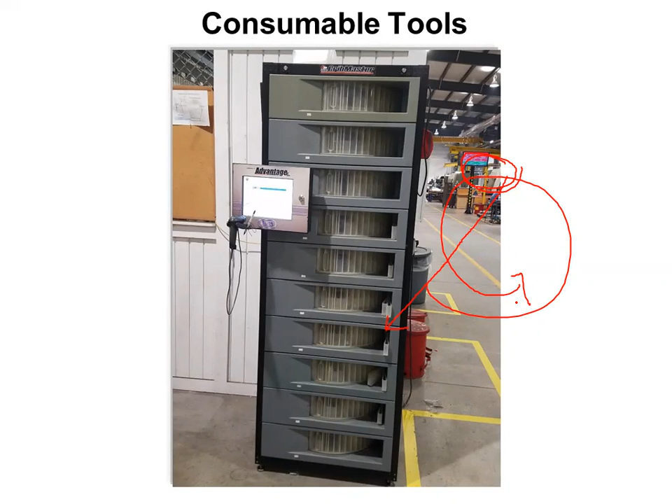This was another one. So we had people from the machine cell here walk to this tool vending machine near the plant manager's office to get inserts. So they run out of inserts and they walk all the way here. This machine may not be working, right? So then what do they do? They say, oh, let me see, there are other machinists who run my kind of machine around the shop. So now they'll go walking around the shop looking for friends who will say, hey, do you have this insert? I didn't see these inserts in the vending machine, can I borrow some from you? How much time does that take while the machine in the cell is idle?

So behind this vending machine, this room here, that's your tool crib. There were even more inserts here. There were boring bars, there were micrometers, basically many common tools that they could not afford to buy more of, they were all stored here. Half of them were broken. We had situations where boring bars with inserts on them had been robbed. Some machinists came in, didn't find the insert, they walked up to the boring bar, they unscrewed the insert, and they walked away with it. And now you have a boring bar which cannot be used.

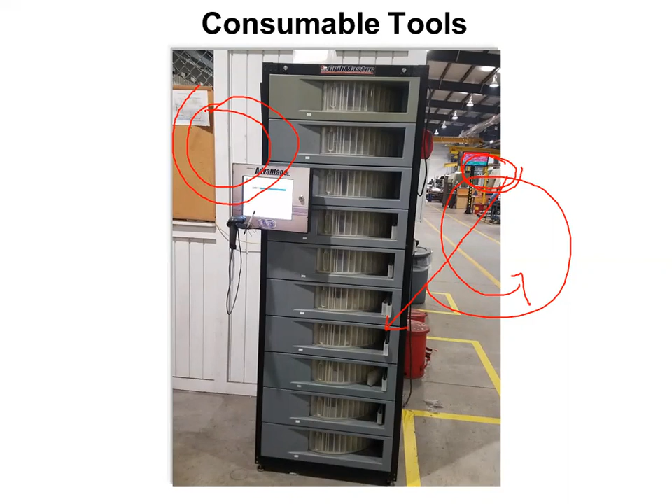So what was the thought process? We couldn't get the idea implemented for political reasons that I absolutely will not mention in public. But the basic idea was, look, why can't these inserts be managed in the individual work cells? So the thought was, could we basically have a vending machine put inside the cell? Or at least could we have it this way that once we recognize from the usage reports from the vending machine the operators in cell one, we look at their usage of inserts coming off this vending machine, could we basically have Kanban containers put inside the cell, like a two-bin Kanban, and when Bass Tool or AJ Rod or any other insert supplier came to the shop, they just looked inside each Kanban bin and replenished the number of inserts per the min-max values set for that bin. So the idea was correct, but politically I ran into a firestorm and realized it's best not to go there.

But again, that's how you do continuous improvement by implementing cells. You say, look, why is the machine idle? Why is the operator engaged in non-value-added work? Why? And once you find the root causes, you come back and say, okay, what can be done so that this lost machine time, this wasted operator time, can be essentially eliminated. And that's basically what drives all the Kaizens you do, or the more involved projects you do.

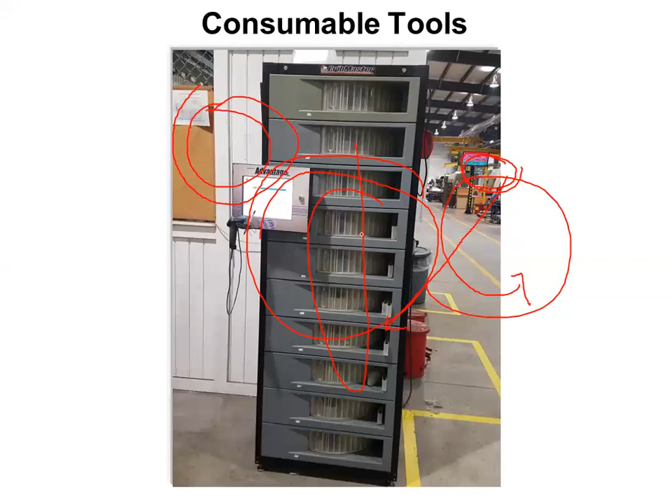So these are all the other things, like I said, continuous improvement, and consultants are expensive and they have to be let go. But these were some of the items of work that were left, that Todd continued with his group. So workload analysis, do we have enough machines? Or are we still sending work from cell one to other machines? How often are we doing it? Could we be more efficient at doing it? Theory of constraints, are we using the machines enough? If not, could we improve?

Then we wanted to prevent the machinists from editing programs at the machine. There's this negative practice called dogging, but let's not go there. Then there's machine maintenance - machines fail. Maintenance was not too well set up, but then they changed personnel, and that department began working much better.

We wanted to have the cell operators maintain a performance board. That didn't go very well with the plant manager, whose position was, well, they're not even educated, they don't even know how to add - all sorts of reasons. But the thing was, how do we know? How does the cell know how they are doing? Don't we owe it to them to be able to reward them, guide them, know where they need the training?

This was important. Now, we don't know if we have the time to do that. My personal experience was the operators were gung-ho - train us and we'll put that training to work. But management has to understand they'll have to get away from running their machines. You can't just train in a vacuum; the same people being trained are not going to be running the machines.

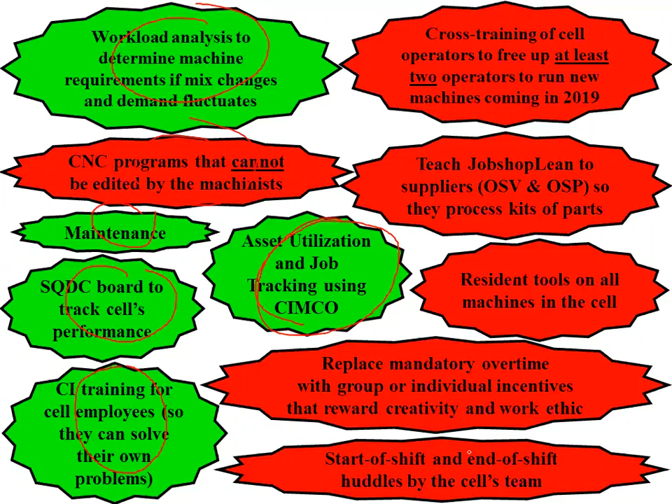Then, in general, oil tool parts are turned and maybe milled. In some cases they're only turned, in some cases they're turned and milled. So we basically said the shop should be divided into Minion Lane for small parts and Monster Highway for big parts.

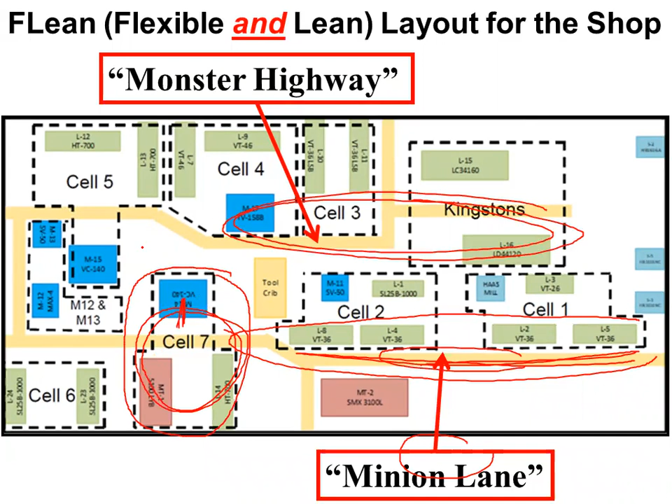I'm sorry, I don't know what these work cells are. That you can check with Todd.

But now here, the Monster Highway is where we say, you know what, we can't have cells. We are going to go to something called cascading cell. And what does cascading mean? That we keep the machines in a functional group, but we allow the transference of parts or the splitting of batch to be more convenient. And we let milling machines be available right across from them. So the Kingston machines were used for really big parts. So we left them where they were.

But the Monster Highway looked as follows: we took machines by size capability and we put them into L or back-to-back configuration, and right across from them we put the milling machines. That was all that we could do. So again, turn or turn and mill.

So we had small parts on one side of the shop and big parts on the other side of the shop, and the cranes and the forklifts operated on the big side, and the carts, pallet jacks, and maybe once in a while the forklift operated on the minion lane side. So that was the big picture. This essentially got implemented, and that was the massive transformation. And you can see again that as you implement the layout, you will automatically be driven to make other changes, the so-called continuous improvement.

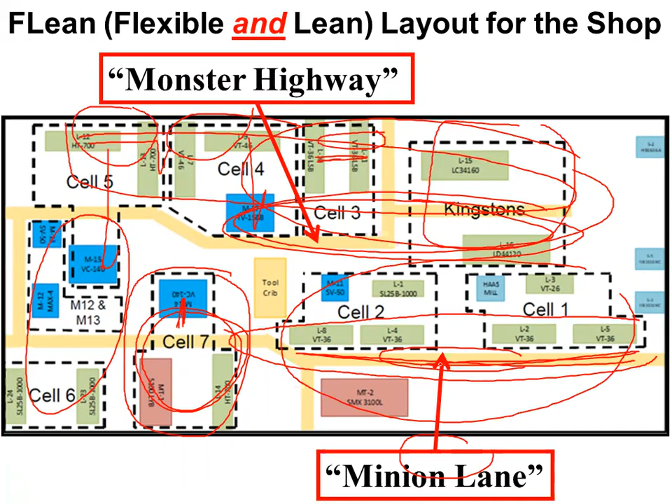So I will not spend too much slide time on this one. Again, this is a big discussion, a lecture by itself, but you've heard people saying, oh, continuous improvement, theory of constraints, lean, Six Sigma. And some people have said integrated TOC Lean Six Sigma. And then there's operational excellence. Everybody says, oh, continuous improvement, right? Personally, I feel that you can say bye-bye to all these buzzwords and stick with something which actually produces tangible results. So you can start looking at creating work cells.

And how does the continuous improvement start? It starts with a thing called cluster analysis. So you take all your product routings and you cluster them. This is called the product process matrix. And these are called clusters. And these are called shared machines and exception operations. So if you want to see a value stream map that contains all your parts, well, it doesn't look like a value stream map. It's a spreadsheet, but it sure helps you to visually capture how different value streams belong in product families and how work centers are common across multiple product families. So you should start with this analysis.

I'm not expecting you to do it, but today, the software itself and data science software abounds. So you just need to get with a computer science department or a stats department, and you can get going with continuous improvement using manufacturing cells of product families as the basis for continuous improvement.

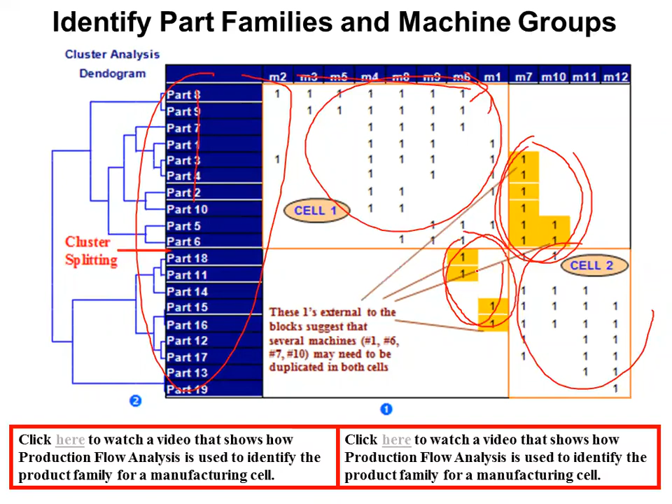And then once you get these non-ideal elements of the so-called product process matrix, these are two strategy maps, and you look at eliminating intercell flows, and you look at how do I run the entire manufacturing business when I have monuments and expensive shared machines external to the cell. So these are all the improvement projects you can do, all the improvements you can make. As I said again, this is almost a lecture by itself, but this is again continuous improvement.

And you get your value stream, you get your setup production, you get your quality control, you get your morning huddles. You can make all the improvements you want, but you're not using words like Six Sigma or TOC or Lean.